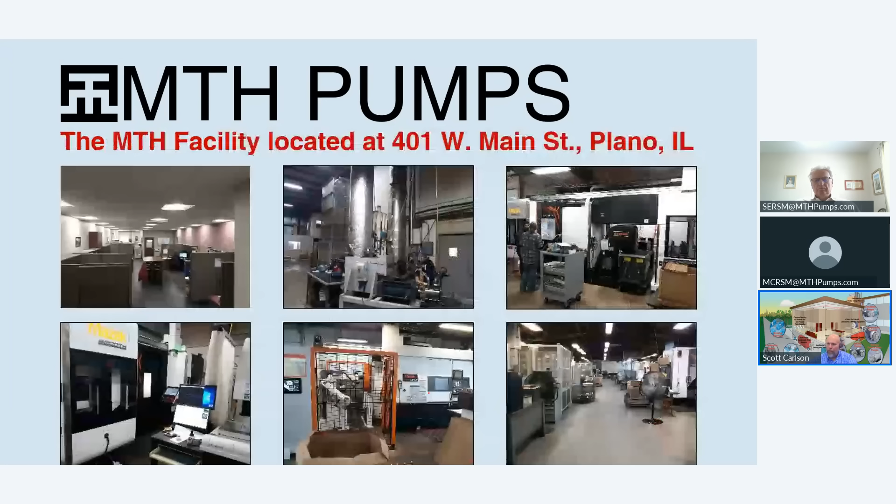A little bit of a quick picture tour of our facility. One thing I want to point out is that we do have a full sales office. So when you call MTH, you get live people. You don't get a recording. So we have several salespeople working full time to answer any questions you may have.

Some of the other things to highlight here, we do have our own R&D facility for our engineers, and like I mentioned earlier, we have a lot of CNC machinery working 24 hours a day, 7 days a week. We do have a full tool room and pattern shop. We have a room dedicated to OEM products that will actually hermetically seal by welding pumps robotically.

We have a warehouse that has millions of dollars of inventory in it at all times. The reason I bring that up is because we have an expedite program -- if you have a customer that's down, we can do an expedite where basically if we get the order in the morning, our time, we can usually have it out that same day as long as the parts are in stock. And if it's a really big emergency, a lot of times if we don't have something in stock, we can usually figure out how to go up a size, down a size, different configuration, different material to be able to still get you your rush. So if you ever come across that, we are able to do that.

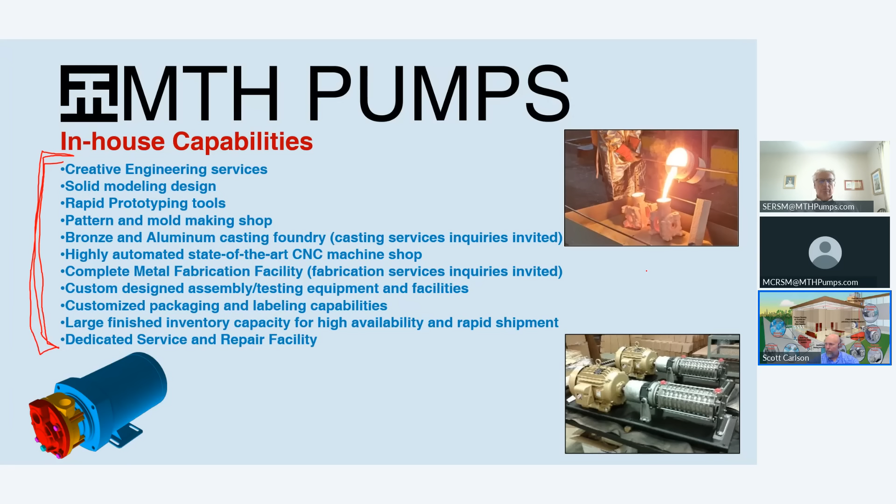I mentioned earlier that we have our own foundry next door. Our foundry is one of a handful that is capable of doing what's called small run investment cast stainless steel. Normally, when you get investment cast stainless steel, you have to have a minimum order of usually a few hundred or more. We have a special setup in our foundry to be able to do as little as just 1 or 2 pieces at a time. This is a real advantage for MTH because we can always get castings when we need them, but we can also entertain outside work as well.

Getting into some of the regenerative turbine pumps, one of the biggest characteristics about a regenerative turbine pump is that it has a steep head capacity. That means that we can achieve high pressures at moderately low to medium flows from this group of standard products.

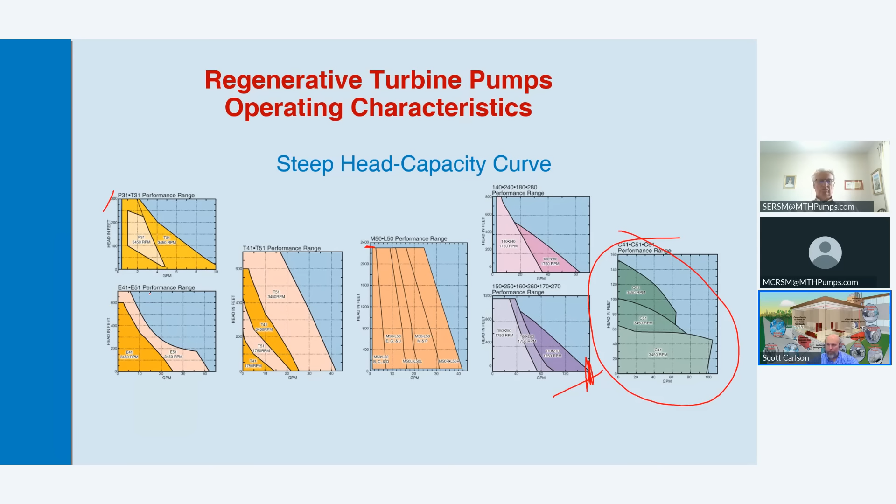We start out basically at the smallest and work our way up to the largest. We do have some centrifugal pumps as well, but our highest pressure pump here is our M series. It can hit 2,300 feet, which is 1,000 psi. Our largest pumps have a run out of right around 160. That's some of our flex coupled pumps, and we do have some very specialized high pressure smaller pumps that can go anywhere from a half a gallon a minute on up.

One of the things about regenerative turbine pumps, if you're not familiar, is that when you look at a regenerative turbine pump curve, here we have a 4-stage curve. There's 4 impellers to this. Each time you add an impeller, you add pressure, very similar to how a centrifugal works.

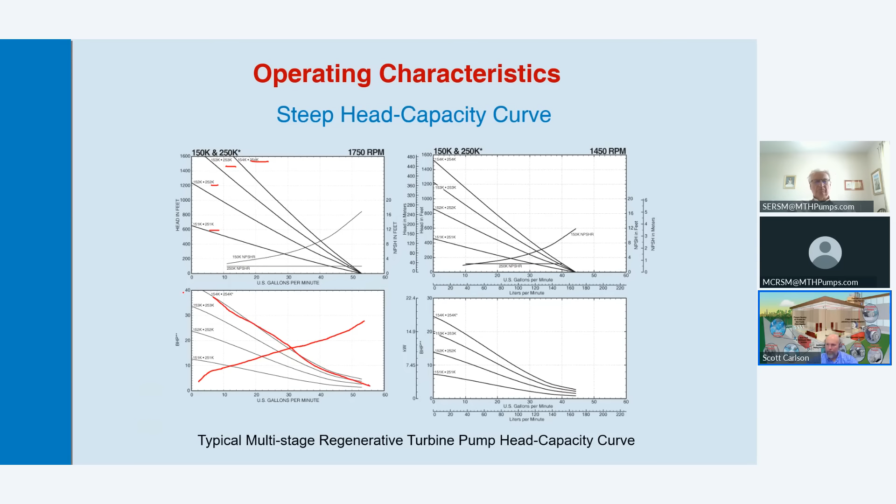Where it gets different is that with a centrifugal, as you increase the flow, the horsepower goes up. With a regenerative turbine pump, it's exactly the opposite. As you increase pressure, the horsepower goes up. So if this were a centrifugal pump curve, the horsepower would look more like this. But because it's a regenerative turbine pump, the horsepower looks like this, because the higher the pressure, the higher the horsepower required.

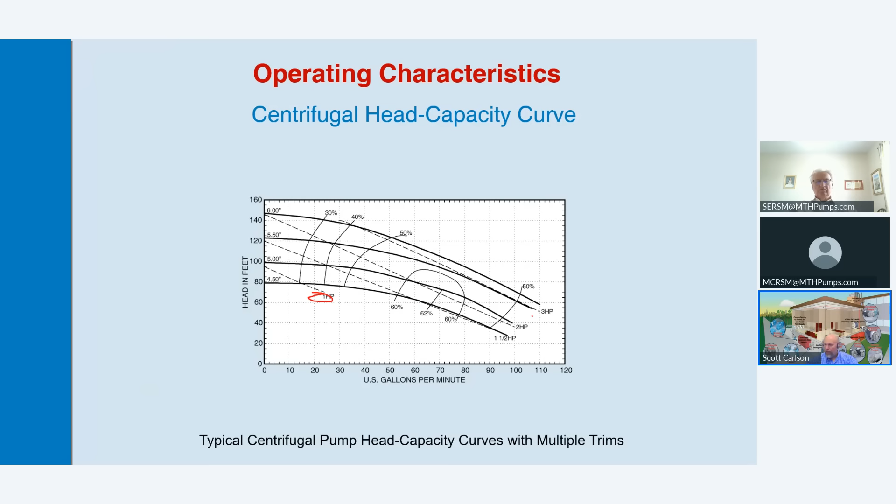Compared to a centrifugal pump, here the smallest horsepower is at the lowest GPM. As you increase the GPM, it gets higher. That's just to show the difference.

Some of the other characteristics of a regenerative turbine pump, besides that high pressure, are that they're usually a compact design. Most of our pumps are close coupled with just a single impeller. We do have some flex coupled that get higher pressures, but because they only have a single impeller, they usually only have a couple of major components, usually casing, motor bracket, impeller, and then all the hardware that goes with that.

Regenerative turbine pumps are pulsation free. If you're familiar with a diaphragm pump or gear pumps or any other higher pressure pumps, usually there's pulsation involved with that. With regen turbine pumps, because the impeller is constantly turning and there's no breaks in the water, it's a smooth flow.

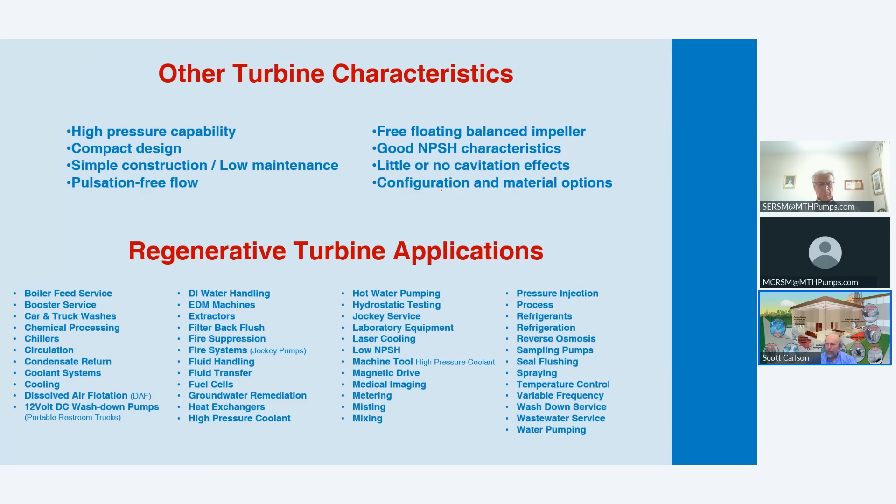Because all of the work is being done on the outside of the impeller, regenerative turbine pumps often have really good NPSH characteristics, which I'll show in just a minute here. And because they have good NPSH, there's little to no cavitation on most of our products.

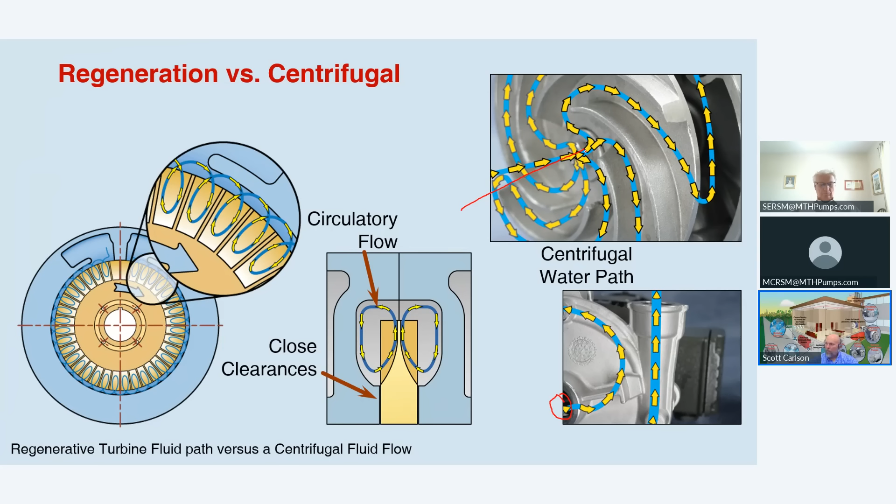So a little bit about how regenerative turbine pumps work. With a normal centrifugal pump, the fluid would normally be introduced at the eye of the impeller, cross the vanes of the impeller, and then go directly out. So any given particle of water or any other fluid is touched by a vane one time before it is exited out of the pump.

If you want higher pressure with this type of pump, you can already achieve pretty high flows, but if you want higher pressure, you have to add multiple stages in front of this so that it builds up a little bit of pressure. It goes in, it goes out, goes back in, goes out to build up that pressure.

Instead of doing these multiple stages like you would with a centrifugal pump, a regenerative turbine pump puts all of the work of the impeller on the outside of the impeller, and it works both sides at the same time. The fluid is introduced on one side, and as it goes through the pump, it gets worked over and over again. As it works its way around, it gets to the end here where it hits a water stop, and then it goes out at a much higher pressure than when it started, and it maintains a pretty low to moderate flow.

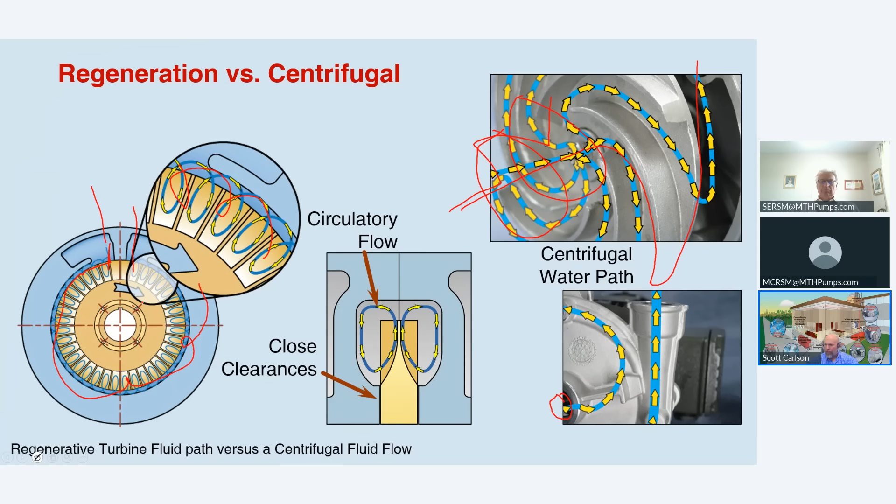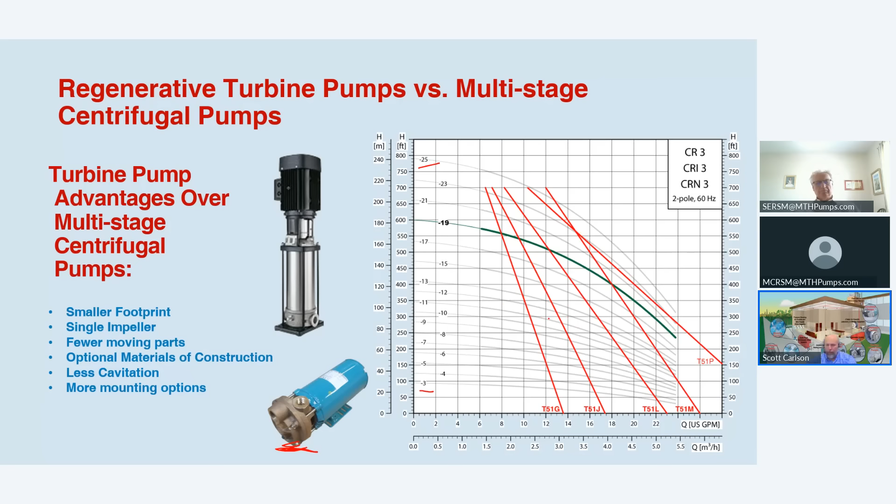Comparing that to a multi-stage centrifugal pump, here we've got a centrifugal pump that has between 3 and 25 stages, and we're comparing it to one of our T51 series pumps, which is just a single impeller. We have a couple different model sizes, but with just one impeller, we can pretty much cross over any point inside of the 23 or 25 stages of that pump, which means we could replace a very large stacked centrifugal pump with just a single impellered pump. This is ideal for OEMs or limited space applications, when you want to put your pump in a cabinet where it needs to be in a quieter situation. Filler manufacturers like using them because of that.

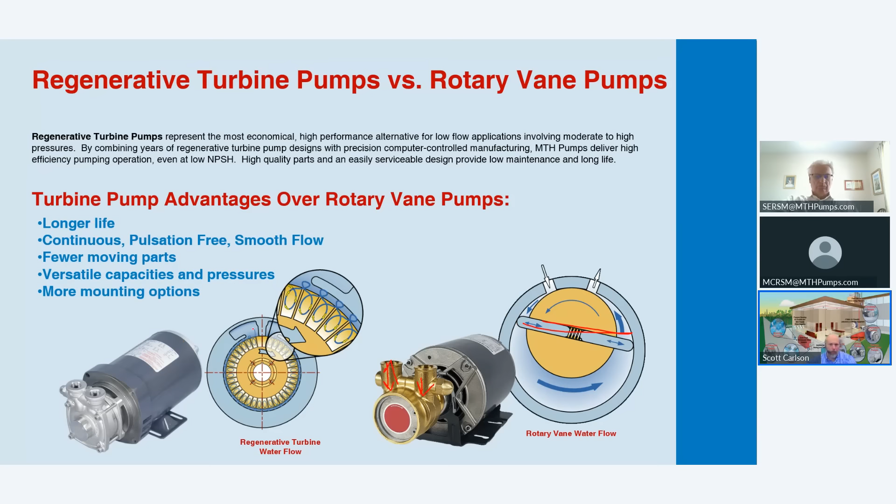Another comparison would be to a rotary vane pump, also called a sliding vane. Basically you have a couple of blades that slide back and forth as the pump rotates, and that's how they get their pressure, by forcing the fluid through without letting any fluid escape. There are companies like Fluidotech or Procon where the liquid goes in, through the sliding vane, and out. As a result you get pulsation - the break in the fluid gives the flow a waviness - and there are rubbing parts that move. So usually a regenerative turbine pump can last quite a bit longer under the right conditions, of course.

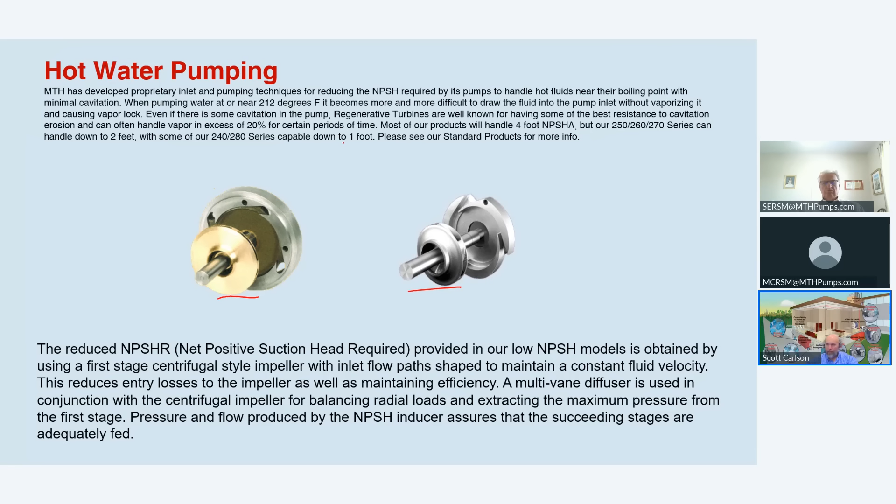With the regenerative turbine pump, normally a close coupled pump would run at a foot or less of NPSH required under normal circumstances. But some of our larger pumps, typical to most regenerative turbine pumps, need between 4 to 16 feet of NPSH required. If you have boiling water or any hot liquid that will vaporize into steam when it gets too warm, most pumps can't pump steam, they can only pump solid fluids. So if you need a lower NPSH pump, we can put an inducer impeller in front of the regenerative turbine impeller. With the 100 series pumps, it makes it a 200. With the M series pumps, it makes it an L series. That lets it take the NPSH required from 4 to 16 feet down to a constant 1 or 2 feet. So it can really drop that NPSH.

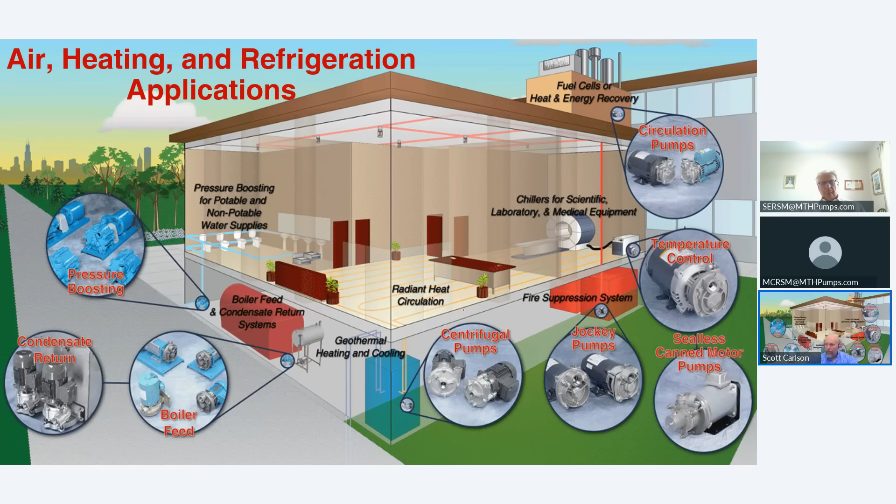We'll get into some of the applications here. We're going to start out with air heating and refrigeration applications and other construction type applications. The first one is booster service - any kind of application that requires moving water up to a higher level, or using water at higher pressure, like a pressure wash for a car or truck wash. You would use a regenerative turbine pump for that.

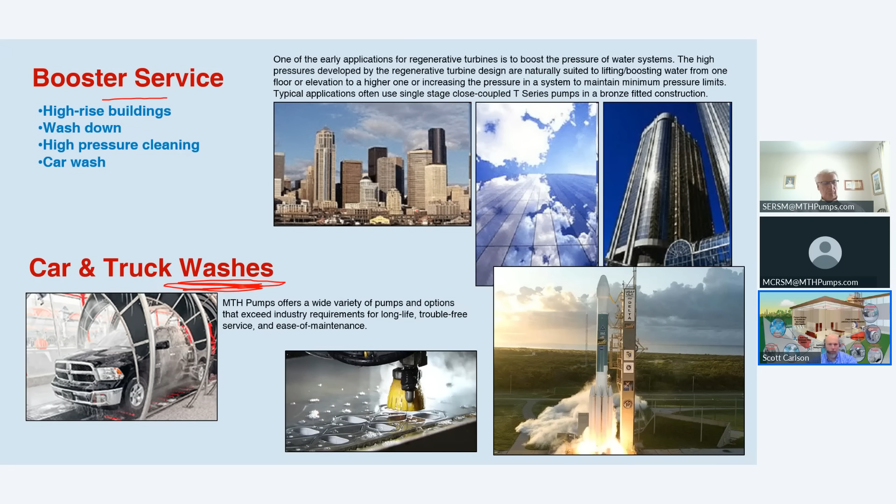With some water jets, the regenerative turbine pump cannot produce that much pressure - usually those need 20,000 psi or more. But what a regenerative turbine pump does do is work well as a priming pump for these water jet cutting tools. But any kind of pressure boosting up multiple floors, MTH pumps work very well for that.

One of the other applications is boiler feed service. If you're not familiar, boiler feed is where you have a boiler system in a building under pressure that needs to circulate hot water or steam as it's operating. When that steam turns back into water after circulating, it goes into a condensate collection system, and you need to refill the boiler. When you refill the boiler, you have to have a high pressure pump to do it, so regenerative turbine pumps work really well for that.

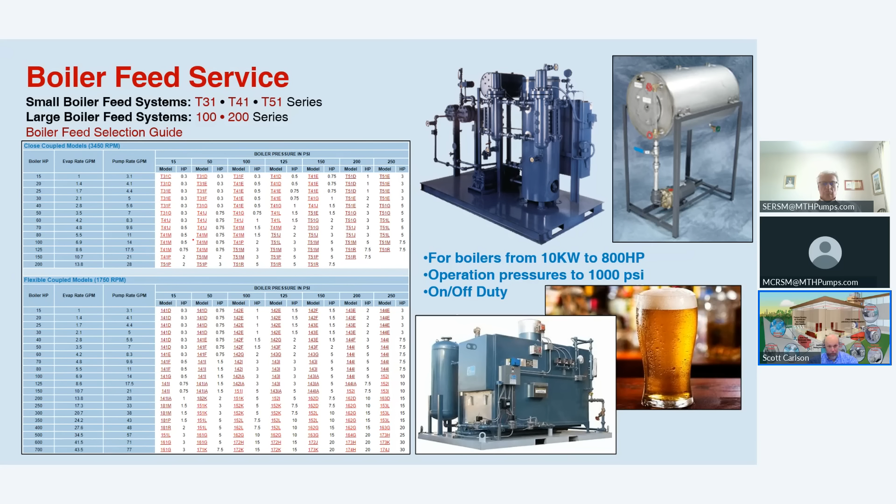They use this kind of system for multiple different kinds of buildings, but they also use them in different kinds of processes, including microbreweries and other brewing type applications where they need to heat things up or cool them down quickly.

After that steam has condensed back to water and is collected in a condensate system, you can either return it back to the boiler feed pump or the boiler feed set, which doesn't require a large amount of pressure, so we have centrifugal pumps that work well for that. But if you want to move that condensate directly back into the boiler system, you can use a regenerative turbine pump.

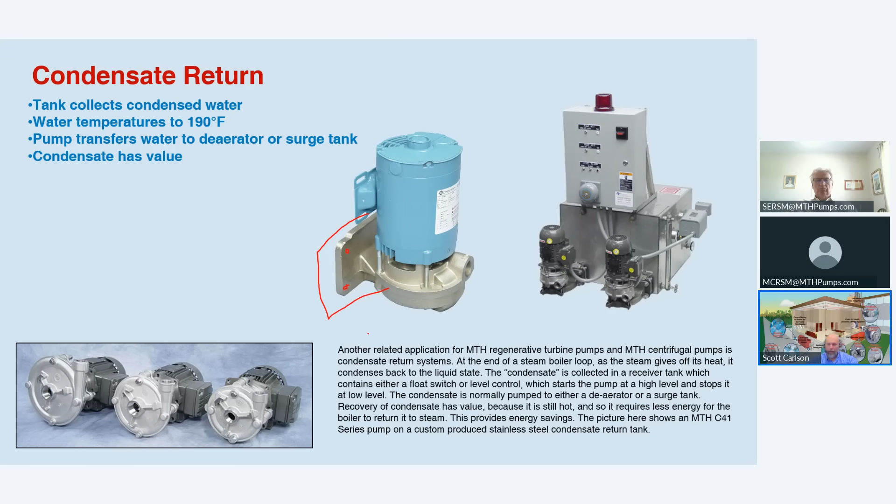The display on the screen is showing a turbine pump with a flange on it, that flange is just a blank flange. We have programmed our CNC machines with the ability to take this blank flange and cut it to any existing flange size within these parameters. So if you have an Aurora, a Dunham Bush, a Shipco, or a Sterling, we can usually fit it up to the existing tank, so you don't have to remount studs and do a lot of custom work to get it to fit.

Another application is when you have a fire system, especially if it has multiple floors. City pressure only has a certain amount of pressure, so you need something to boost that pressure up to maintain it behind the sprinklers. Normally a fire system has two pumps: a large main pump, and a smaller pump that kicks on every once in a while to repressurize the system. When there's a fire and the sprinkler gets set off, it releases pressure, tells the system there's a fire, releases the rest of the sprinklers, and kicks on the big pump that dumps hundreds or thousands of gallons a minute. But you don't want pressure leaking from a check valve or a leaky pipe, so you use a regenerative turbine pump to keep that pressure at a much higher rate.

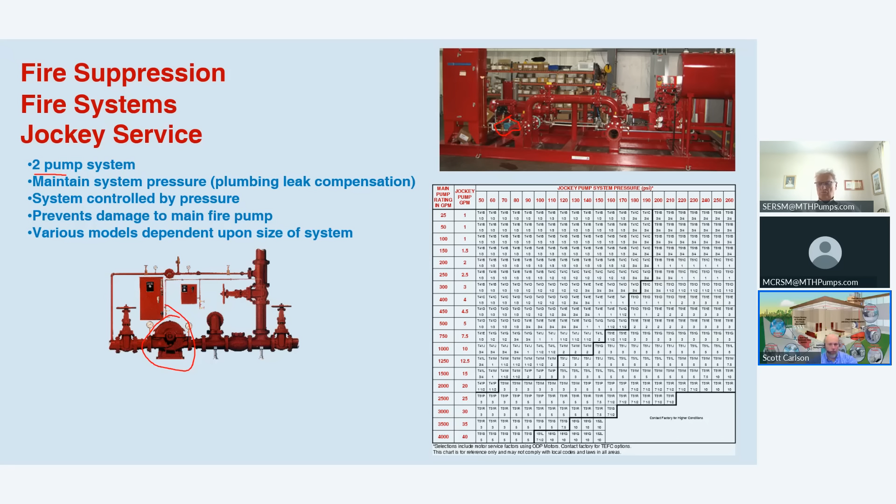Continuing on, another application is coolant systems. Any kind of geothermal heating and cooling needs to circulate fluids over great distances, usually hundreds if not thousands of feet through piping that has friction losses, then back up again. Regenerative turbine pumps work well for that because they can maintain the same amount of flow no matter what the pressure conditions are, or change it very little.

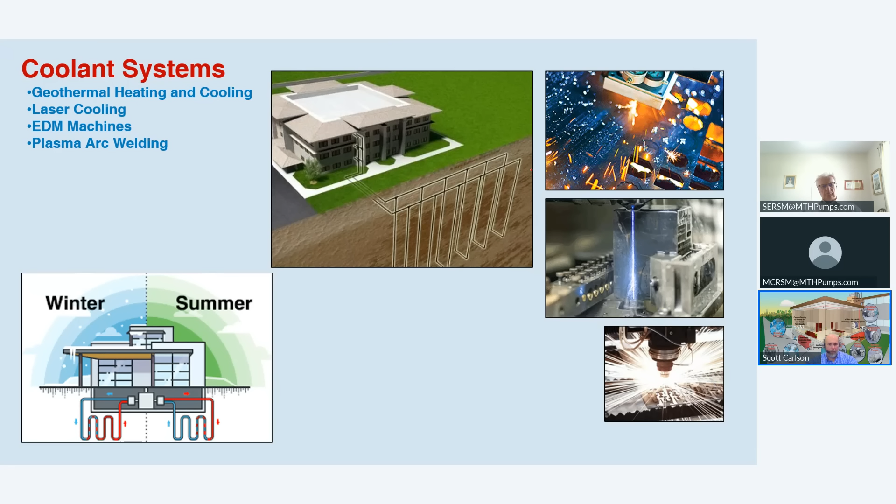So they work well for geothermal heating and cooling. Some of the other cooling systems are any kind of cutting tool that uses a high amount of heat, whether it's a plasma cutter, a laser, or a welder. You can use high pressure to push coolant or another fluid through the cutting tip to keep it cool. So when you're looking for places to sell regenerative turbine pumps, any place doing cutting is going to have some type of system to move fluids through the cutting tool.

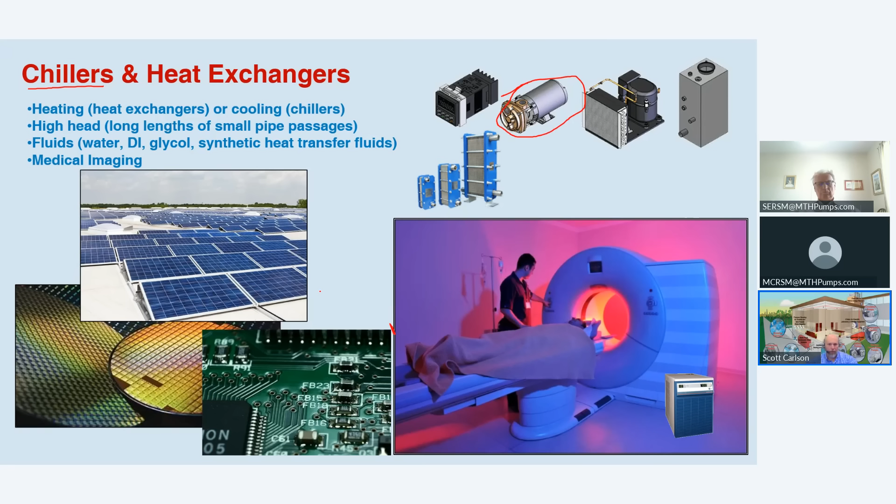A lot of those systems use a chiller. I mentioned before that most of our pumps have a pretty small footprint that allows them to fit into a smaller cabinet. They use these chillers for anything from welding machines all the way up to scientific equipment for manufacturing computer chips, solar panels, or even medical imaging for MRI machines. They have to maintain that temperature while taking pictures during operation so they can keep a clean, clear picture.

Some other pretty common high pressure applications are closed loop systems where the entire system is under pressure, such as heat recovery, hydronic systems, or boiler feed, which we just discussed. Other places that manage chemical processes, refineries, textile mills, or wood mills all need high pressure fluids to operate, so regenerative turbine pumps can usually be found in them as well.

Any kind of fluid handling or fluid transfer, especially transferring from low pressure to high pressure, regenerative turbine pumps work well for that. They also work well with mixing, especially for dissolved air flotation.

One thing I want to highlight is this tank, called a seal quench gland. What it does is there are processes in the paper and pulp industry that use a fluid which will crystallize if exposed to the outside atmosphere. The way a seal works, you have your seal seat and your rotating element, and a thin film of fluid forms between them to create a barrier keeping it from reaching the outside atmosphere. With a fluid that crystallizes on exposure to outside atmosphere, that thin barrier of fluid will slowly eat away at the seal until you have a total seal failure.

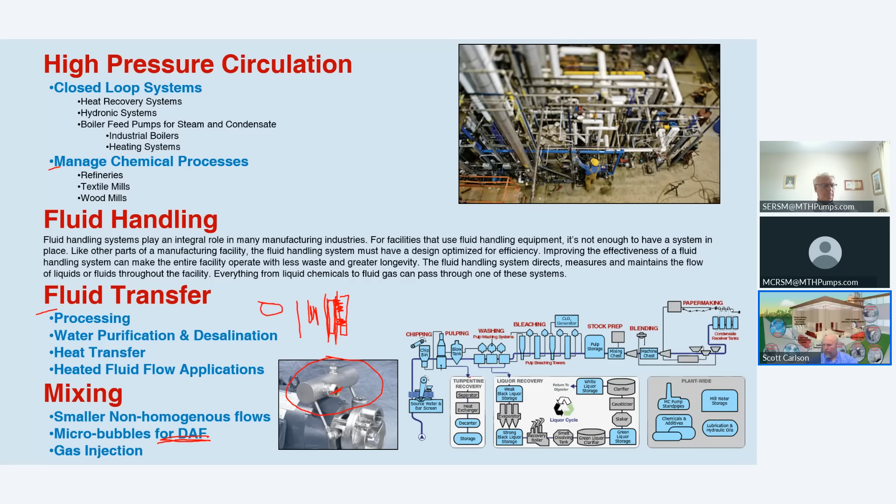There's oil inside of this quench gland, and the oil circulates really slowly and it doesn't leak. So with the sight glass, instead of worrying about a catastrophic failure in your system, you can just have your maintenance guy take a look at the sight glass, and if the oil in it is higher than it should be, lower, or even cloudy, then you know it's time to change the seal, and you can schedule proper maintenance rather than having that catastrophic failure.

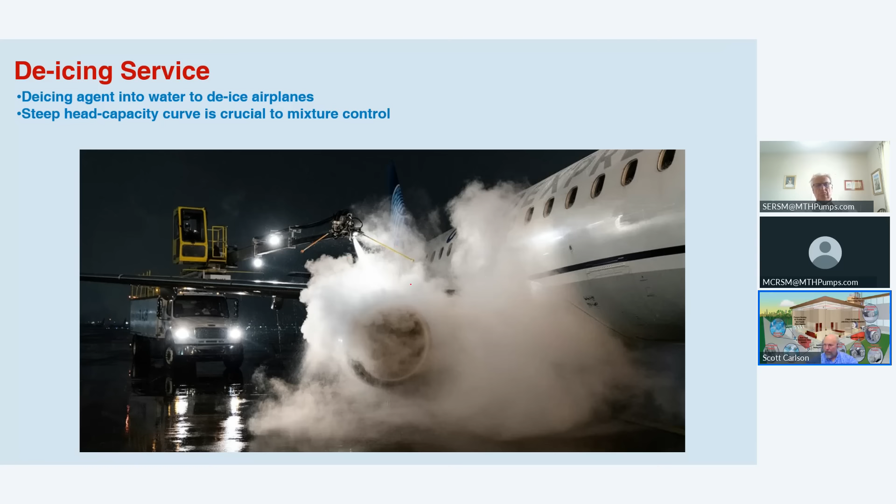Another application is de-icing of airplanes. Any type of spraying with any fluid that needs to go out at a high pressure, regenerative turbine pumps work very well for.

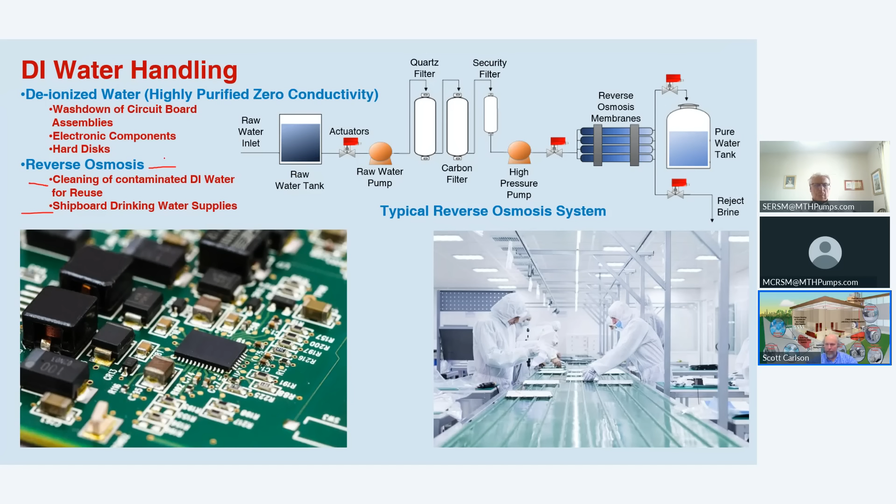Deionized water handling - anytime you need a clean room type situation, we do have a version of our pumps that are sealless canned motor pumps. One of the things we're developing right now is a mag drive version of our pumps as well, but that's still a ways out. Any kind of deionized water, reverse osmosis, any processes like that that need clean fluids, MTH pumps are ideal for.

Along with fuel cells, this is our canned motor pump, our X41 series. It gets used in a lot of different applications. One is when they put a fuel cell on top of a building or on the corner of a city block for a hospital. If the power goes out, it uses a fuel cell to operate and use a regenerative turbine pump to circulate coolant or whatever other processes need to be used for it.

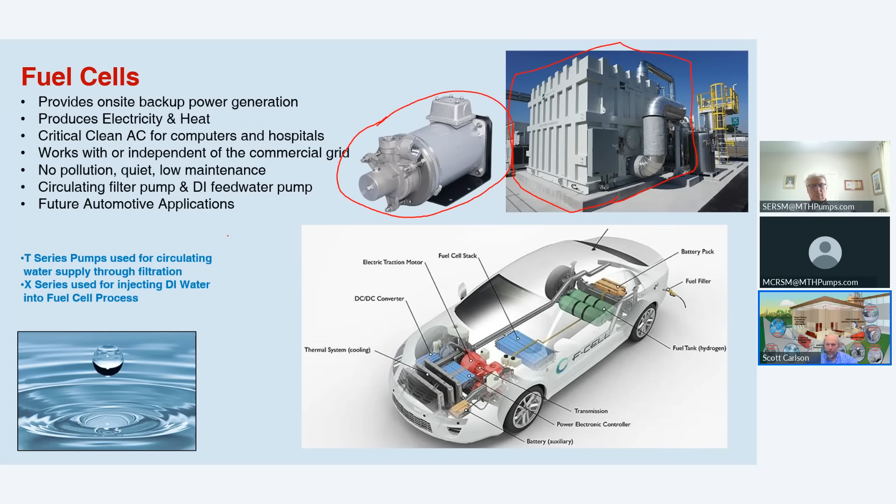One of our newer pumps is our HP series pump. These are our welded, hermetically sealed pumps. They get used primarily for freons and CO2, including any other kind of refrigerant that is non-conductive, because it's a wet wire pump. The fluid goes through the motor while it's operating, so you can't have any fluid circulating through it that is conductive, or it could cause an electrical short.

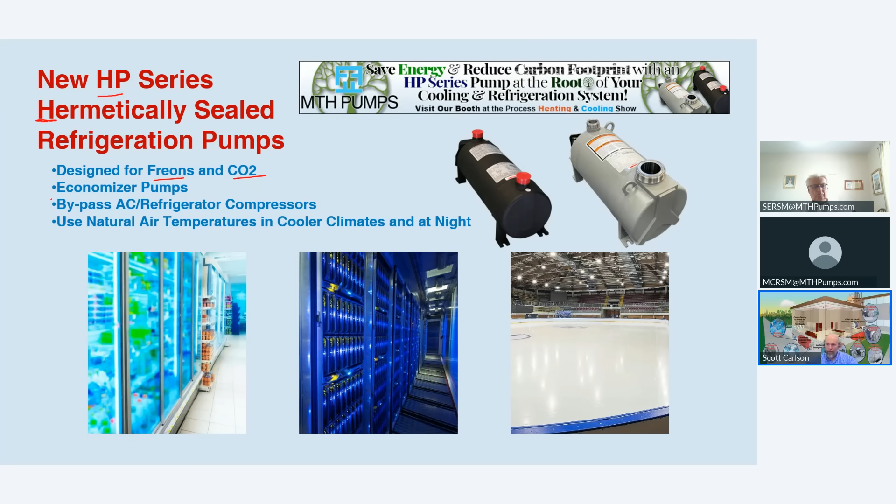But these get used primarily in economizer packages. The way that works is when you have a refrigeration unit in a building, you have a compressor that works with it, usually 10, 20, or even 30 horsepower. When that compressor needs to run 24/7, using an economizer package - when the weather outside is at or below the temperature you need to refrigerate at - you can turn off this very large compressor and circulate the freon using one of our smaller pumps in this economizer package, and it goes through a heat exchanger that's either on the roof or side of the building that uses significantly less electricity.

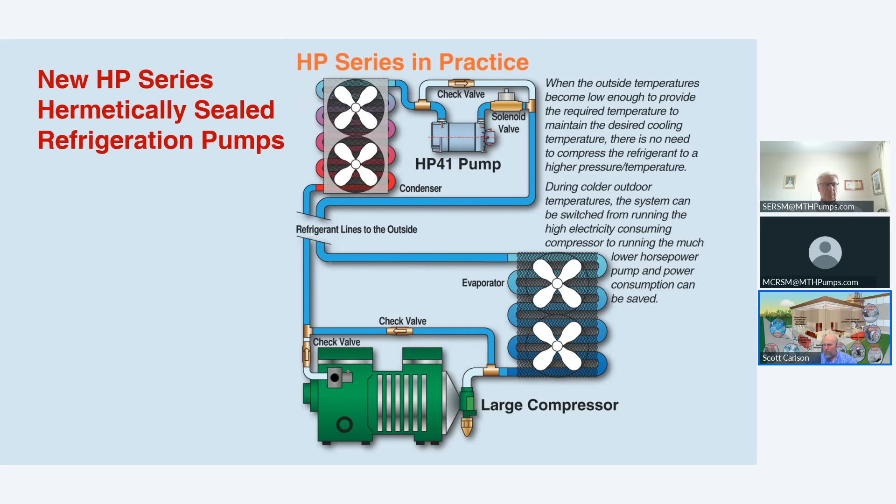If you have a building with several refrigeration units running, you could have several of these compressors running all at one time, using a lot of electricity to operate. If you can shut those down for a couple hours a night, or even during a whole winter season, using a 1 up to 4 horsepower motor instead of a 20 or 30 horsepower motor driving a compressor, you can save a lot of electricity that way.

We'll look a little bit into water and wastewater applications. One of the big ones for MTH here is the dissolved air flotation, or DAF. They use DAF in a couple of different areas. The way it works with the regenerative turbine pump - commonly known for high pressure - is that in DAF it's not used for high pressure. Instead, we take advantage of the number of impeller vanes in the pump, and we introduce air into the suction side of the pump, and that air mixes with the water and produces microbubbles.

These microbubbles go into a wastewater area, and they grab onto the particles that are in the water and pull them up to the top of the water, where they can be skimmed off. They can either reuse the water somewhere else, or clean it enough to put down a normal drain that would go into a city wastewater facility.

Where these get used, as far as we know, is in different kinds of food processing. When you have all the processes done for making food, you usually have quite a bit of water that has a lot of bits and pieces of whatever process you're doing mixed in with it.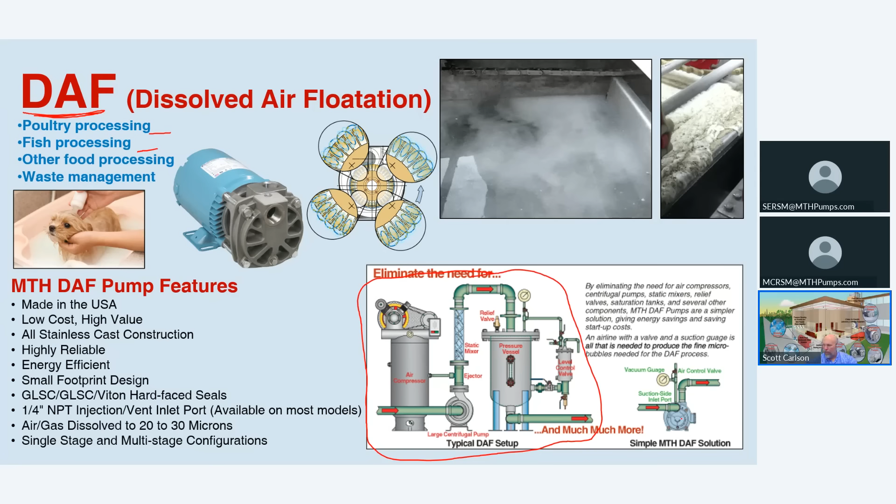I should mention, by having a regenerative turbine pump as a DAF pump, you would actually replace any compressed air mixers or pressure vessels needed inside of your DAF system. So you would replace a whole bunch of equipment that's usually pretty expensive just by using one of our MTH DAF pumps.

Some of the other applications here are seal flushing, filter backflush, extractors, or groundwater remediation. All of these work on the same principle, that there is already fluid moving through something, either a filter or through a process, and you would use a high pressure DAF pump, or high pressure regenerative turbine pump, to push fluid through in the opposite direction to clean out a filter or any kind of groundwater remediation trays or anything like that.

Or if you have a very large pump with a very large seal in it that's expensive and causes a lot of maintenance when you have to change it out, you can use a regenerative turbine pump to push a higher volume or higher pressure of clean fluid into that mechanical seal area to keep that seal clean and cool so it can last longer.

One of the questions we have here: what type of contamination level can you have on a DAF pump? Size, viscosity, etc.

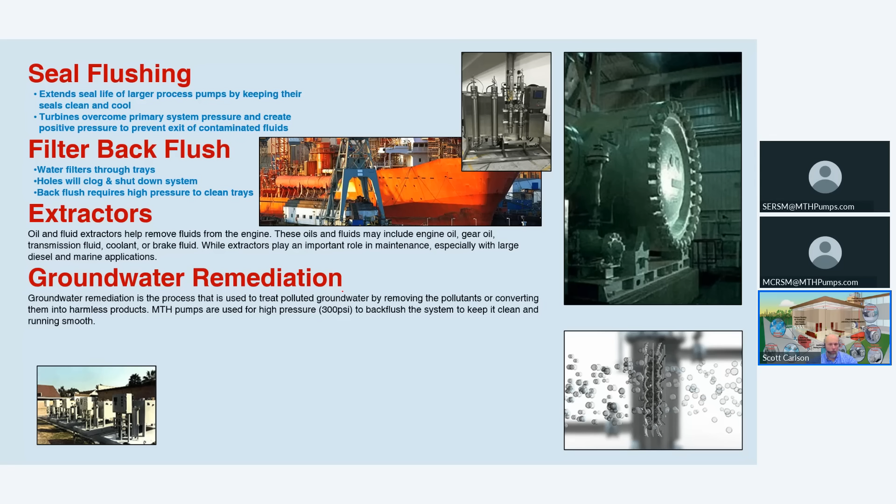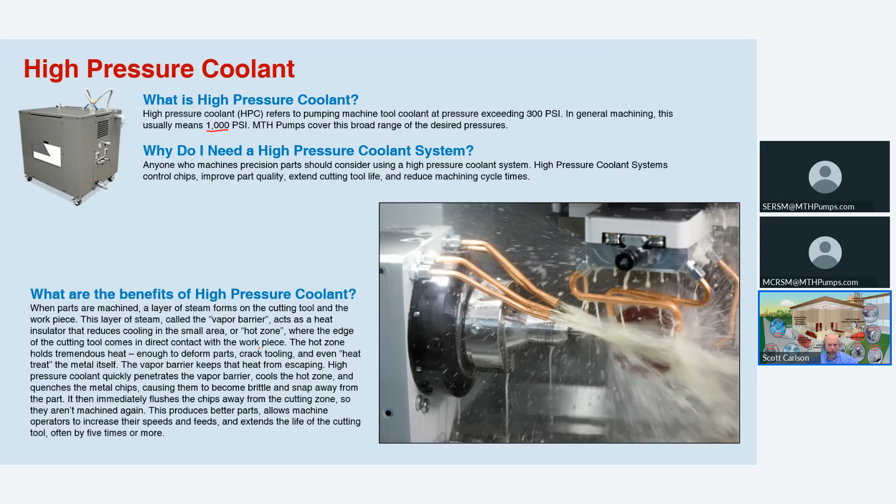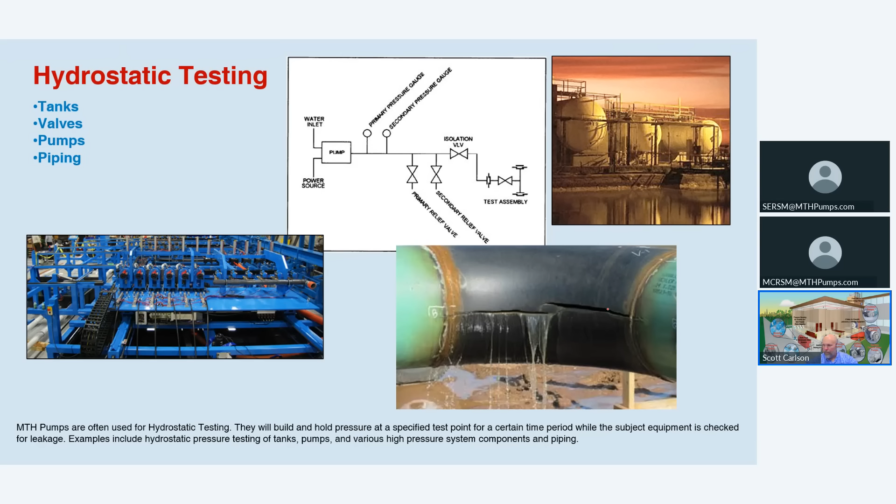Another application here is hydrostatic testing. If you have any kind of facility that makes tanks, valves, other types of pumps, or piping, you usually need a method to test whether or not they can hold a certain amount of pressure. The easiest way is by plugging all the holes and using a regenerative turbine pump to pump in a high pressure of liquid. You turn off the pump, close the valve, and then you have time to search the equipment to see if there are any leaks, to prevent them from being found later when they're out in the field.

A couple more applications here, and we're almost done. We have pressure injection. Anytime you see treated wood, the way they treat it is they put it into a pressure vessel, and then pump creosote into that pressure vessel using the regenerative turbine pump. That's how it is injected into the wood.

Other high pressure methods for pressure injection would be for curing agents into concrete, when they have certain environmental conditions and need the concrete to have a certain curing time. They would use a regenerative turbine pump to pump in that curing agent to properly set up the cement. Other applications are with spraying.

Anytime you need any kind of cleaning, just like car washes or other types of washes, you can use a regenerative turbine pump. They use them a lot for cleaning inside food facilities, using that high pressure for flowing clean water onto different parts of the processes.

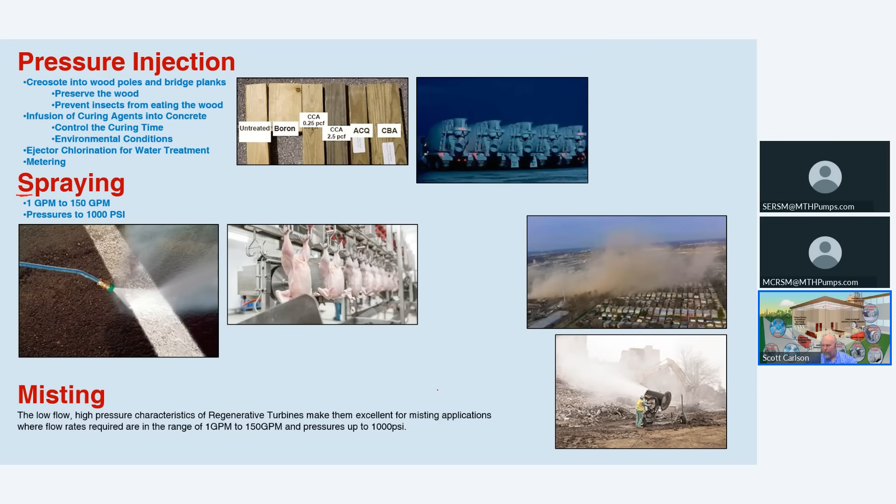Another application along the same line is shooting water through a fine nozzle that makes a fine mist, with a large fan behind it. It puts out a mist over a construction site or demolition site, and that creates dust control. The mist will grab onto dust particles and keep them closer to the ground so that you don't have as much dust as you would normally have in a dry situation.

Other applications here: laboratory equipment. Anytime you need temperature regulation or any kind of high pressure fluids, regenerative turbine pumps, particularly ours, work really well because you can often control the exact pressure and flow you need down to even a quarter of a gallon a minute. They're scientifically engineered to maintain a very steady, very stable flow.

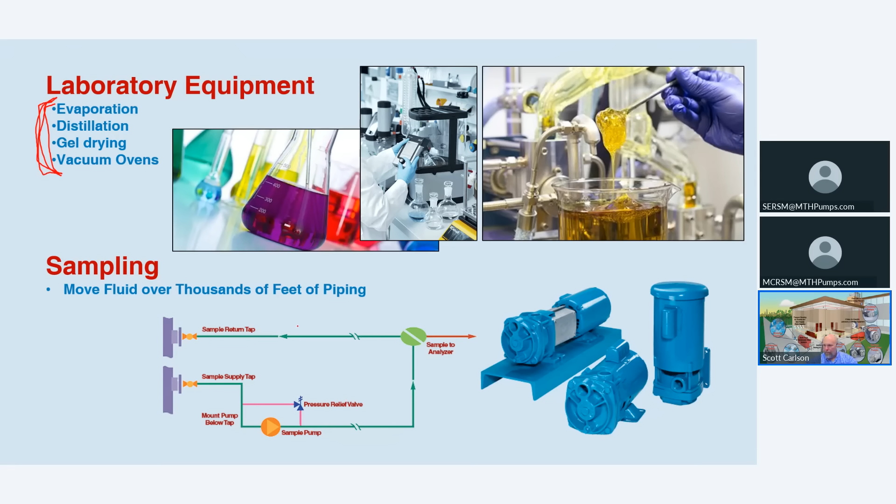Another application, actually very similar to geothermal heating and cooling, is sampling. When you have a very large facility with one centralized analyzing station, you can have a series of piping throughout that entire facility that can take samples of any type of fluid from different locations and move them over hundreds or even thousands of feet to one central location where it can be tested. So they work very well for sampling.

And then some of the other aspects, at least of the MTH pumps, are that we have a number of materials. Our standard materials are bronze fitted, but we also have all iron, all bronze, and stainless steel.

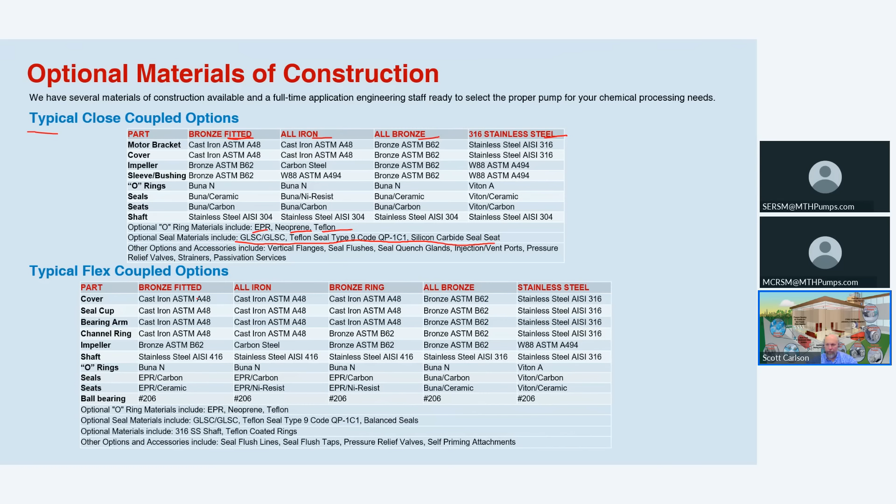We also have a number of elastomer options as well as a whole bunch of different seal options. We have some different accessories to make our pumps vertical. We can put seal flushes in, do that quench gland, injection ports. We have pressure relief valves and strainers here at the facility, so you can order your pump with those pieces on them. And we can passivate our stainless steel. So we do have a number of options for our pumps.

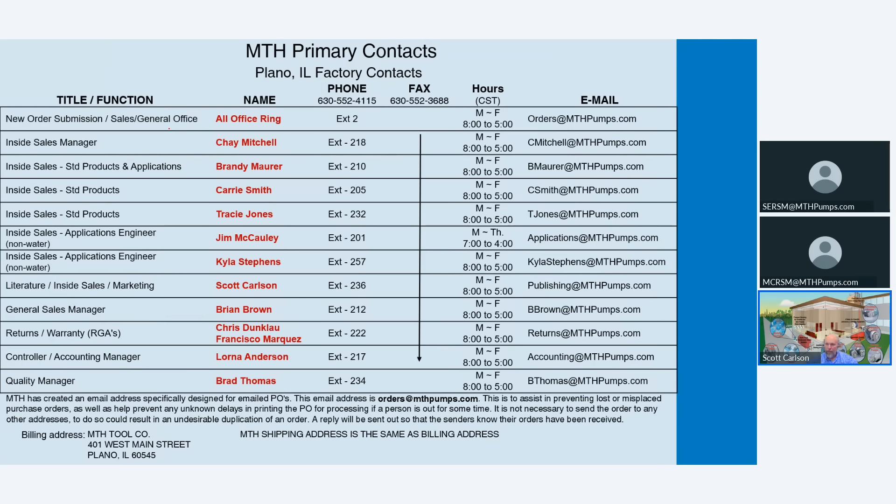Like I had mentioned earlier, we have a full sales staff here, which I do have this in an Excel format or PDF if you want a copy of it later. But we do have all of our salespeople available at normal business hours, so anytime you need to get a hold of a real person, you can.

Some of the upcoming events, we are going to be doing our next MTH School of Pumps, I think in October. We're still planning on that right now. We've already successfully held about 4 or 5 of them. What we do is we invite our distribution from all over the world to come to our facility for 2 days for some intense training. You get to work with our engineers, go out to assembly and build pumps and see how they're tested, and get to do a full tour of our facility, get to go in the foundry, see metal being poured. And we do have a classroom set up so that you get to learn some very fine details of fluids and different technologies.

Some of the other things that we're working on, like I had mentioned earlier, we are working on a sealless mag drive configuration that will be able to go between the motor and the pump to convert any one of our pumps into a mag drive pump.

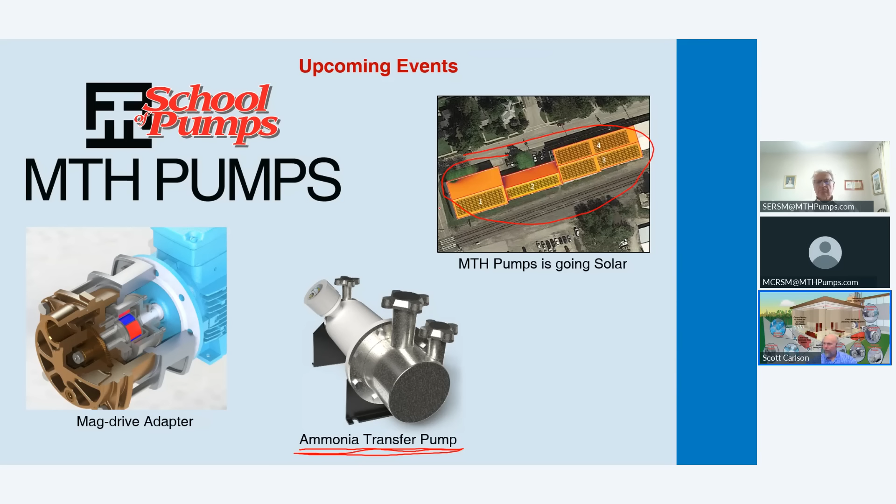MTH installed over 600 solar panels on the roof of our building, so we've gone as solar as we can go with this building. I believe that even with 630 something solar panels, we still are only producing about 30% of the electricity needed to operate MTH. So MTH uses a lot of electricity, there's a lot of machinery going at all times.

And that is just about it. Bob or Jim, did you guys want to add anything? No, I think you've done a good job there, so not much I can add to that. I agree, Scott.